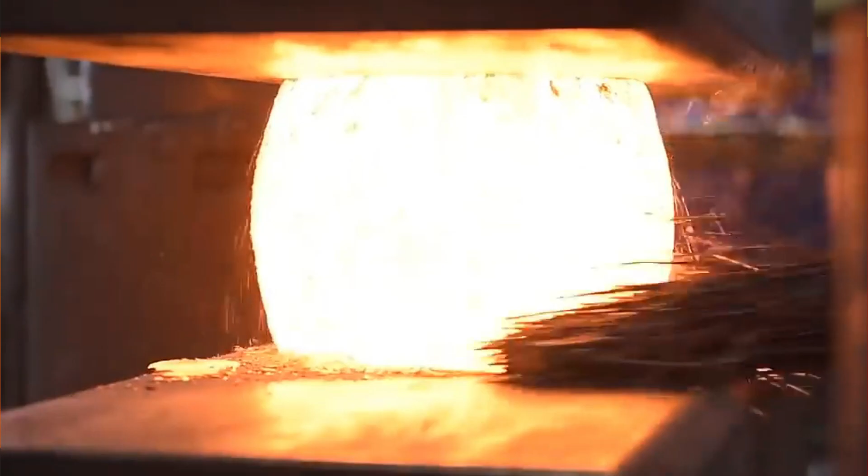Forging may be defined as a metal working process by which metals and alloys are plastically deformed or reduced to the desired shape by the application of a compressive force. Forging can be done both hot or cold. However, forging is often misunderstood to be hot working only. Forging can be done at ambient temperature as well.

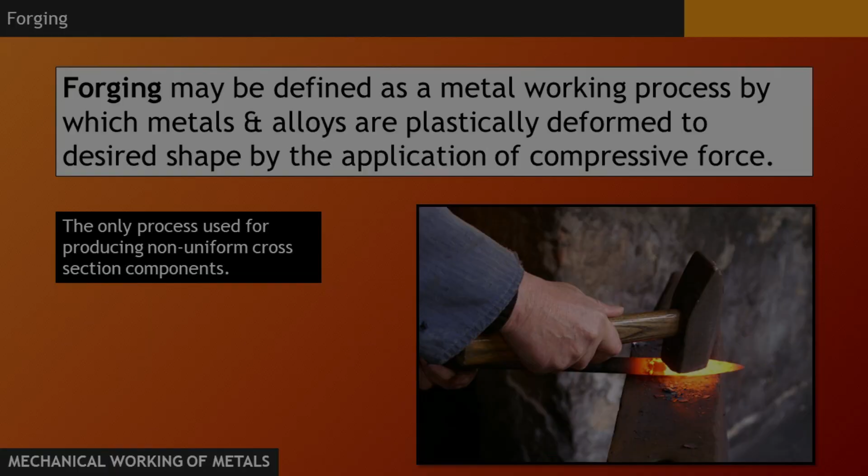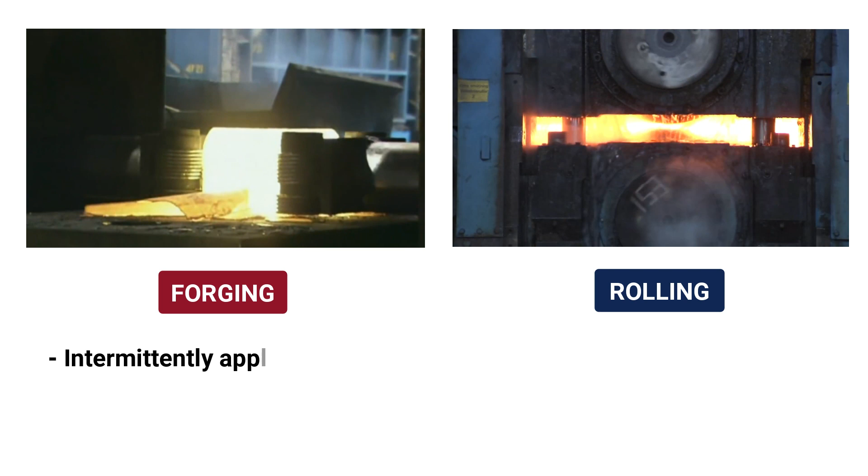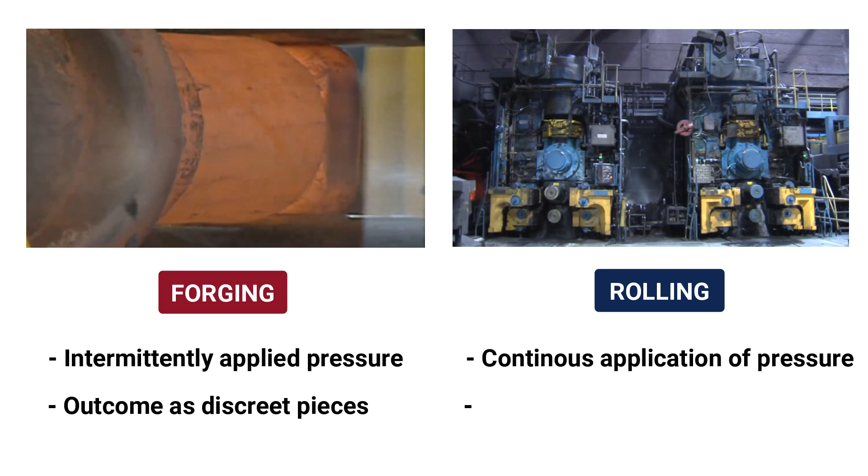It differs from the rolling process, which also employs compressive force to deform the metal. In forging, the pressure is applied intermittently instead of continuously as in rolling. The products of forging are generally discrete pieces rather than a flowing mass as in rolling.

Now, the forging process is superior to other metal forming processes and other manufacturing processes. The reason behind that is the forged components have a comparatively high strength to weight ratio. The reason for the high strength to weight ratio of forged parts is that they have a fibrous structure, and the grain structure or the flow lines of the metal are not interrupted but are made to follow the contour of the forged part. The main objective of good forging design is to control the lines of metal grain flow so that a part with the greatest strength and resistance to fracture is produced.

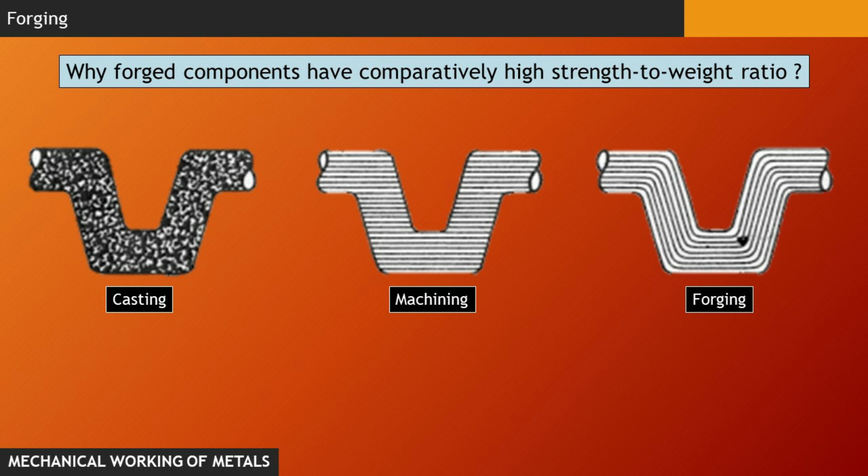This can be understood by taking an example where the same part is produced using casting, machining and forging, as you can see in this particular figure. Here, a similar part is being made by three processes, that is casting, machining and forging. Let's say it's a crankshaft. The crankshaft produced by casting has no grain flow and so has the poorest mechanical properties.

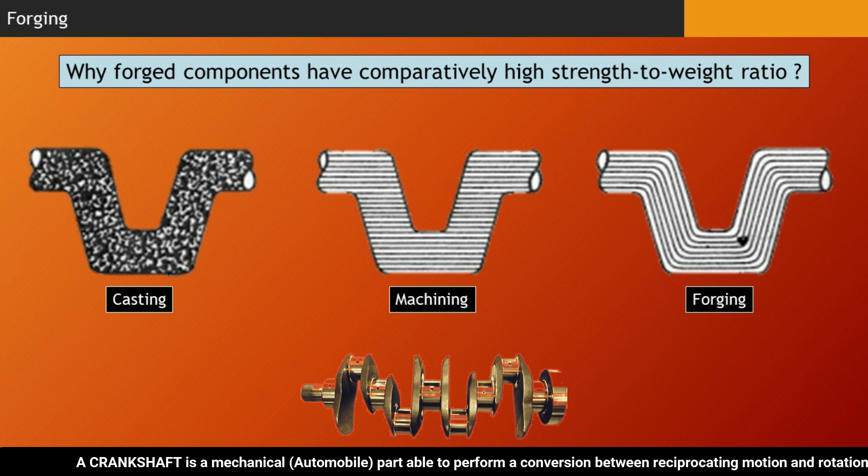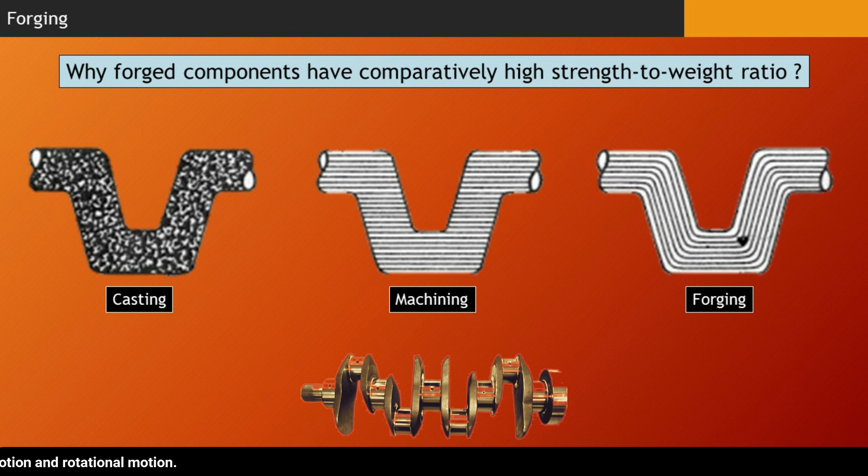The next figure here depicts the same crankshaft made by machining. Here, as you can see, the fiber of the metal is getting interrupted in between, and hence the mechanical properties of the crankshaft will be poorer than those of the crankshaft made by forging. Here, the fiber of the metal has not been interrupted and continues along the entire length of the shaft.